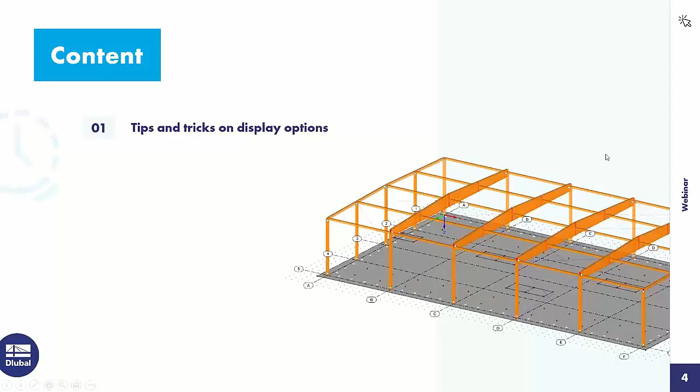To the agenda today: I will introduce some tips and tricks on display options, also on the printout report, and basic information. I will do a single and multiple print of graphics to the printout report. And I show how to create a verifiable printout report. We turn directly to the program.

In RFEM, that's a storage building made of timber and a reinforced concrete floor slab, with bracings from steel, as you can see. The model is completed, it's designed; the timber structure is designed, and also the concrete structure.

We can go through the load cases: self-weight with roof loads and single loads from racks, snow load, the imposed loads with loads from forklifts and from the racks, wind in X direction and Y direction, imperfections in X direction and Y direction, pre-stress, and then there are a lot of load combinations that are automatically created by the program.

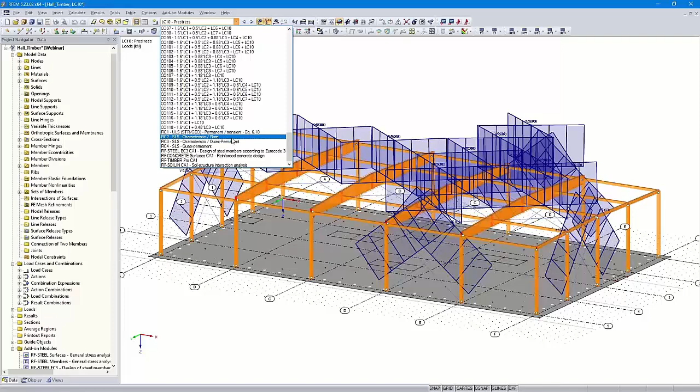Also four result combinations, one for the ultimate limit state design, three for the serviceability limit state design, then the design of the steel structure. Those are only the bracings. You can see a design ratio of 55%. Then the concrete results, also for the floor slab.

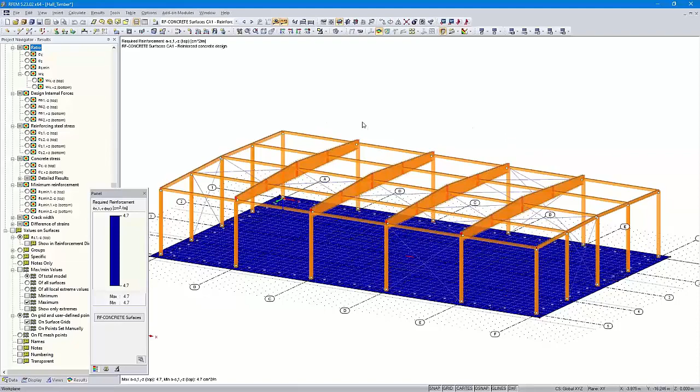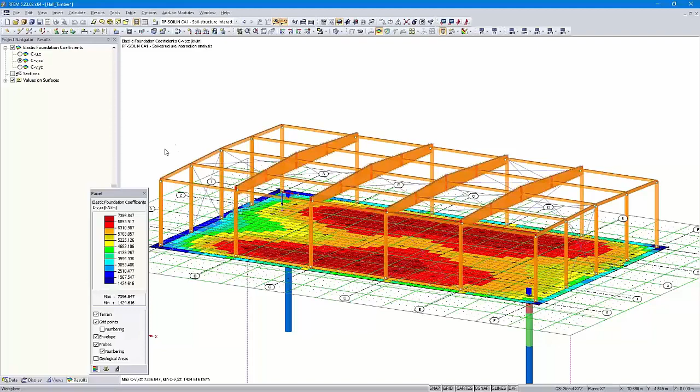Then the results of the timber design. Here you can see a design ratio of 94%. That's in the horizontal beam here, the maximum design ratio. Then I used RF-SOILIN to determine the elastic foundation coefficients. But we want to start with the member results. We want to print them in the printout report.

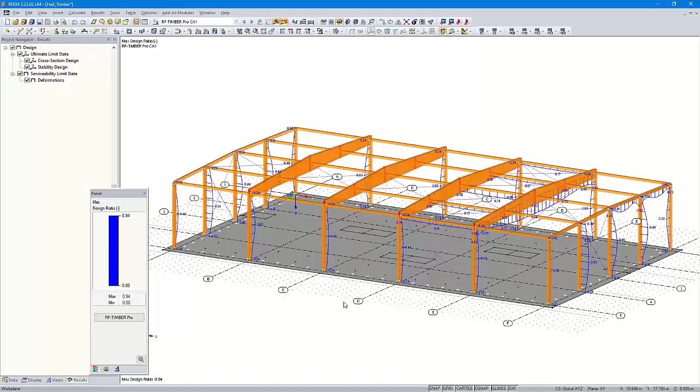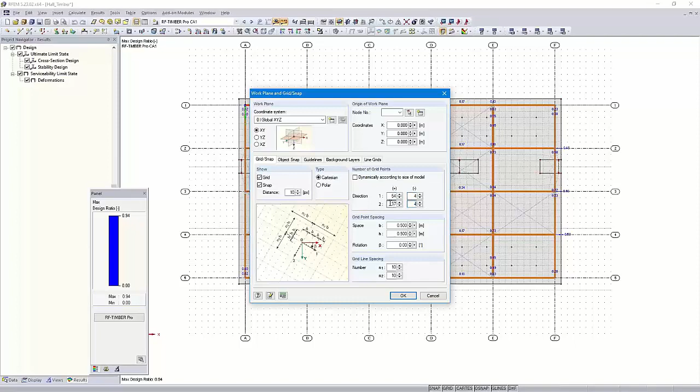But at first, I would like to move the axis designations closer to the model. How to do that, I can show you maybe in the side view. We go here with a right click in the grid options, edit. And then here is checked dynamically according to size of model. We uncheck it and then I subtract here 5. Okay, and then you can see the axis designations are closer to the model.

You can also hide the axis in the display navigator under guide objects, and then you can uncheck the guidelines and the axis would be hidden, but we would like to show them and document them.

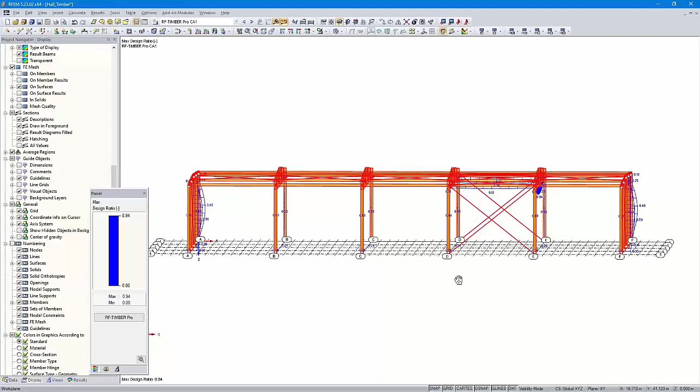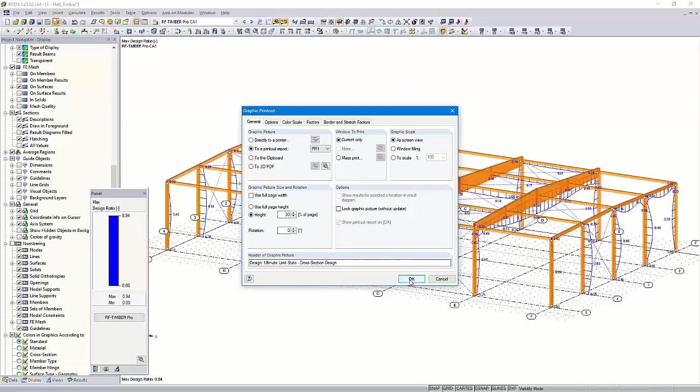Then I make only the timber structure and the steel structure visible with that option, visibility by selected objects, and the concrete floor slab is hidden. Let's print that graphic in the printout report. Here above, print graphic to the printout report, the current only as screen view, that's the option I will use. Then the height, 50% of the page, no rotation, and I confirm that.

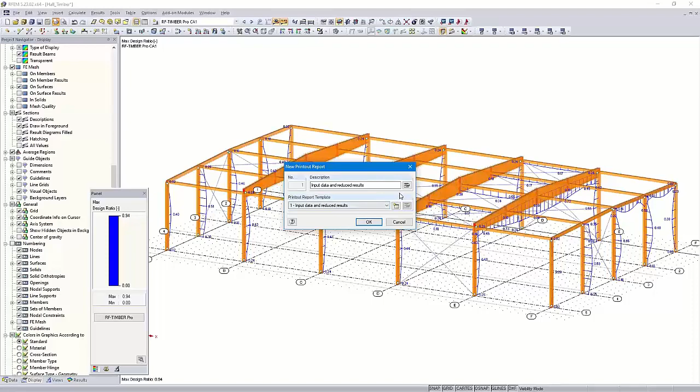So usually we would print the graphic with this option here for the printout report, input data and reduced results. But you can also use other options. But in that case, I would like to disable a lot of pages because we want to print the graphics firstly in an almost empty protocol, or in a protocol with not so many pages, and therefore I disable here the RFEM data, the RF-STEEL data. I leave the concrete and timber data because we would like to print graphics in those chapters.

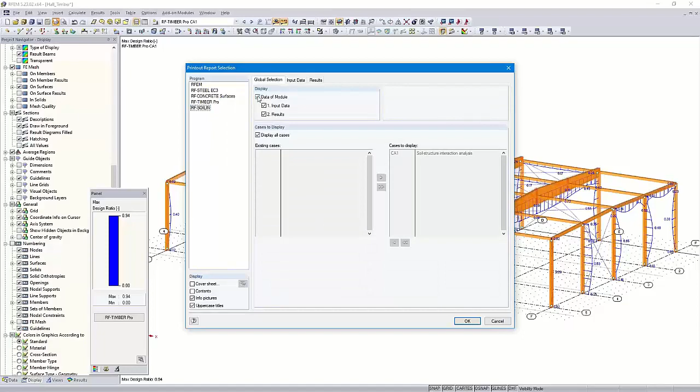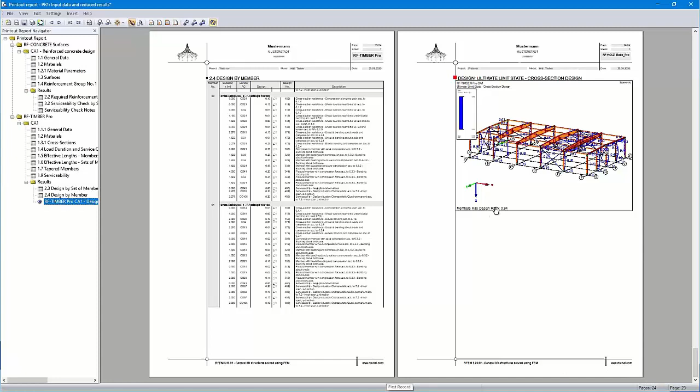So now a printout report with only few pages is created. At the end, we will have more than 170 pages. Now there are only 24, and the handling of the graphics is much better. We can see that graphic is quite confusing, but we can modify that afterwards. By right click, I can open the properties and I can rotate the graphic.

At first I use the full page height and rotate the graphic 90 degrees. Okay, quite better, but I'm not satisfied with this graphic. I will change it here with right click and edit.

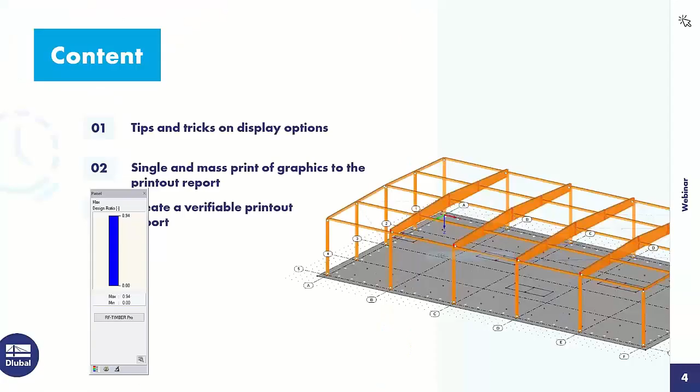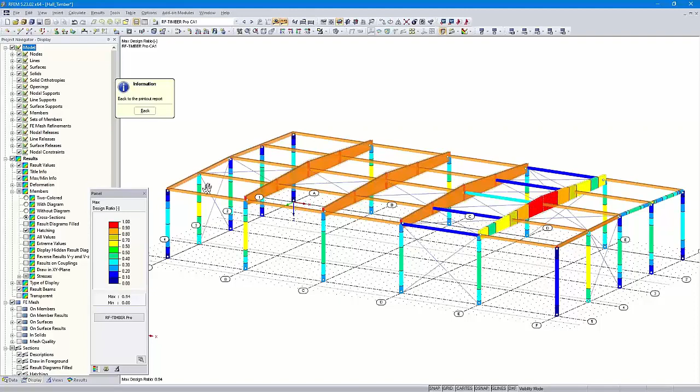I go back to RFEM, and then I can set in the display navigator under results, members, the option two-colored, that's the current state. Then with diagram, it's colored here. Then without diagram, and cross sections. I think that's a good overview. You can see the maximum design ratio is in the horizontal beam here, and I can go back to the printout report.

Okay, that graphic is much better. We will use it, and we would like to print that graphic of the axis E separately in the printout report. We leave the printout report with saving that graphic.

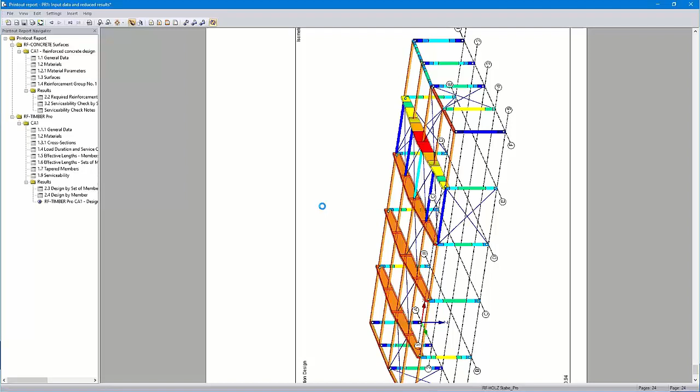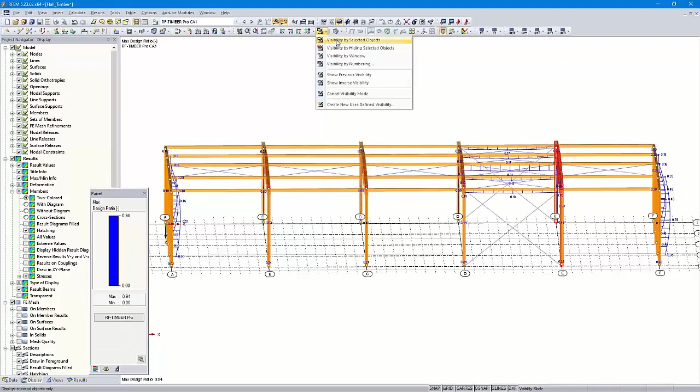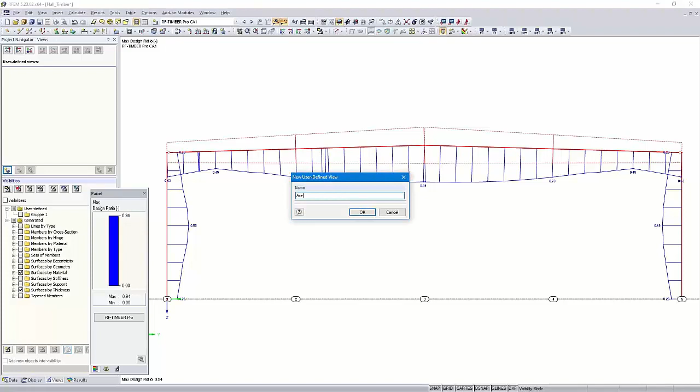Then I create a new visibility. I use this option here, the same as when I click the right mouse key, visibility by selected objects. I use the wireframe display mode, and we can create a view. For example, here, create new user-defined view. I can call it axis E.

You can go back easily later to this graphic. I'll show you: I cancel the visibility mode. For example, this view, and I click here to axis E and come back to this graphic. Here you can see the 94% design ratio. We print that graphic, that's quite easy now.

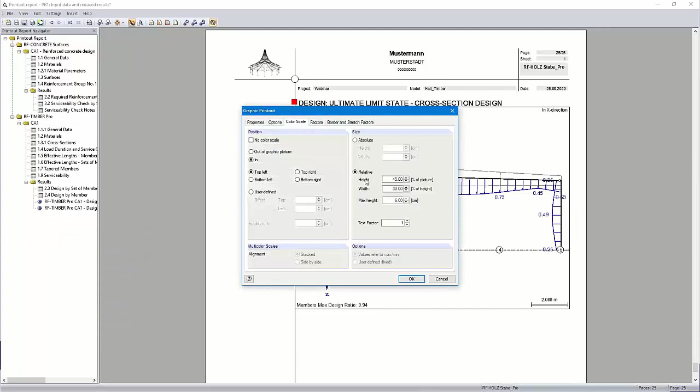Now that graphic is also created. It's quite sufficient. I could make the panel smaller here with properties. I can use a color scale and width of 20%. That looks better. I could move that to the right side a little bit, but I don't do that.

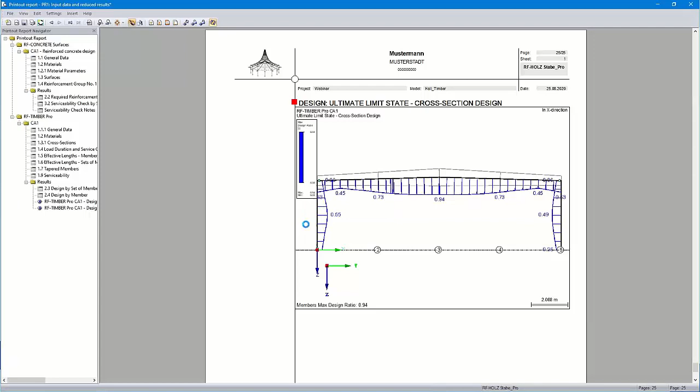We leave the protocol with saving the graphics, and then we print the reinforcement results.

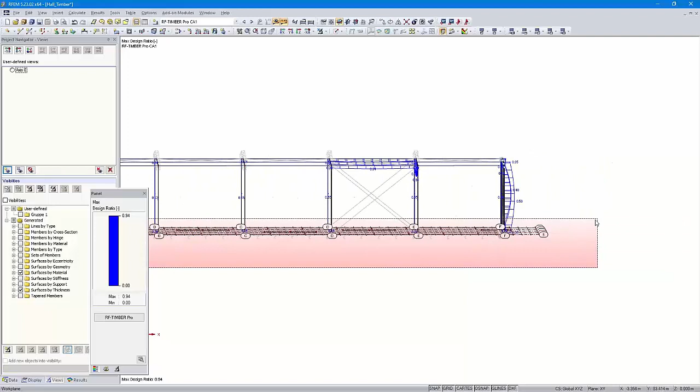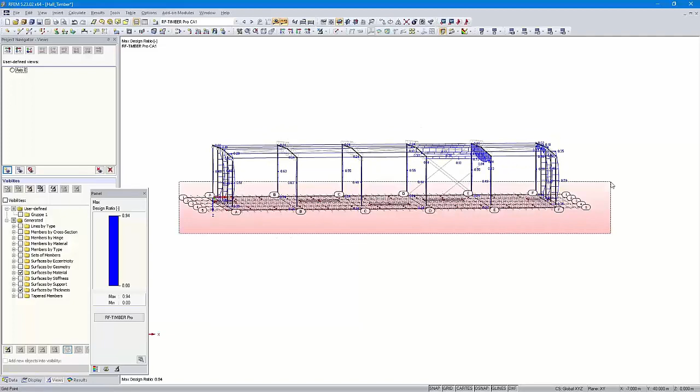I choose only the concrete floor slab in the view. Just a moment. A view in Z direction.

A small tip: when you zoom in and out in a graphic with the mouse wheel, you can see steps. If you want to zoom in and out without steps, you can press the Shift key and the middle mouse key, and then move the mouse back and forward, and you can zoom in and zoom out continuously.

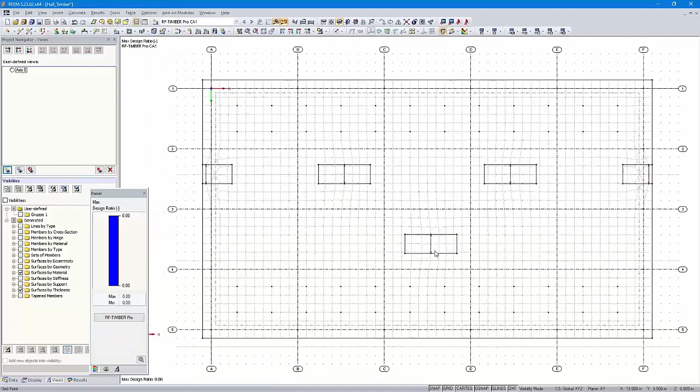Then we go to RF-CONCRETE Surfaces and the results. Those are the required results governing the ultimate limit state and serviceability limit state. You can see there are almost the same values in the concrete floor slab because of the restrained design.

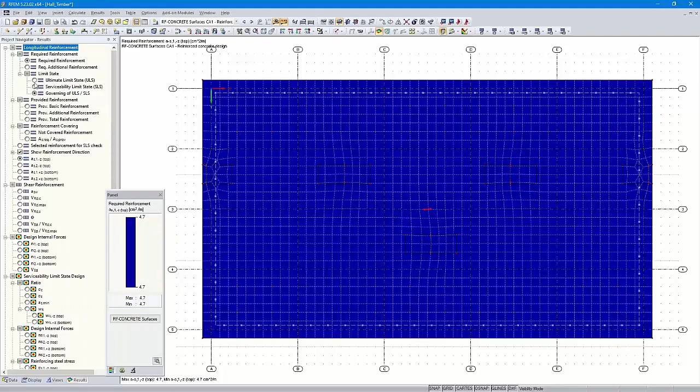I use in this webinar the graphic of the ultimate limit state design. This graphic has more different values. You can see here the values between 0 and 2.7, and 0 and 2.8. Those graphics are more informative.

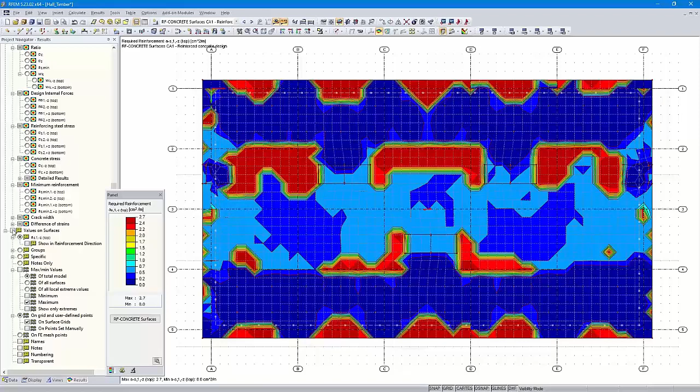I could print that graphic, that would be absolutely sufficient. But I would like to do a more difficult task. I would like to print a graphic with all values in all grid points. I check here values on surfaces, on grid and user-defined points.

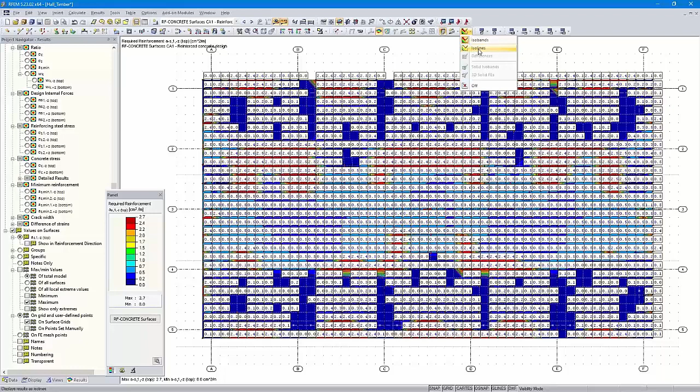And when I have all values here, I can use not the isobands, but the isolines. Then I test the print. I print the graphic. I use the full page height and rotate it 90 degrees, and we will see how it looks.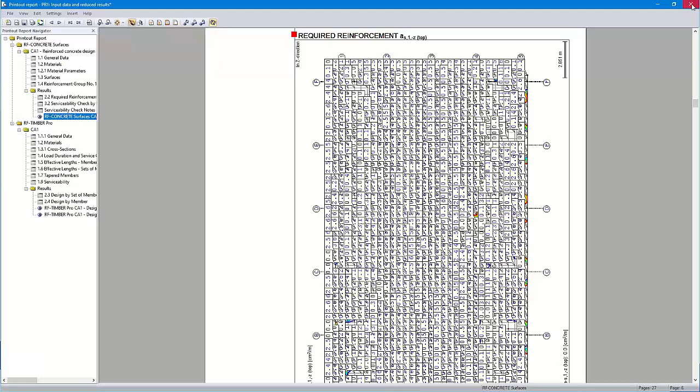Now we can see the values are too large. The graphic is quite confusing, and we leave the protocol without saving.

By right-clicking at one value, we can open the display properties, and we are on the right place here: result values on surfaces. We can change the settings separately for the screen and the printout report, but we can also use identical settings for both. We change only the setting for the printout report.

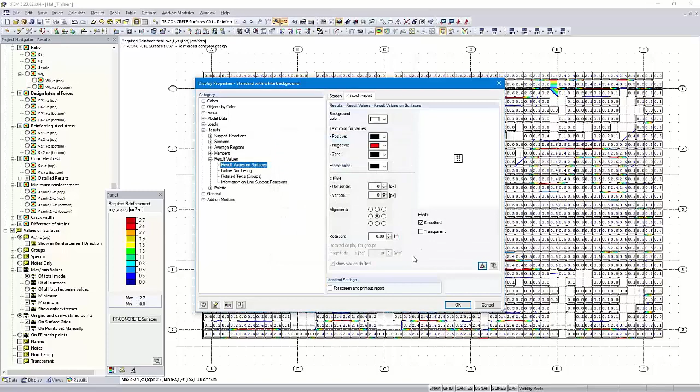I use the black color for the values here. Then I delete the arrow here. Then I move the values to the middle of the grid point, and I change the font size to 4. That's in German because my Windows is in German, but it doesn't matter. So, okay.

And then we print it again with the same settings. Just a moment, and then we will see that it looks much better now.

Now we can read all the values here. At least for a PDF print, it would be absolutely okay.

Then we leave the printout report because I would like to show you a mass print only for 4 pages, for the 2 directions here, and for the top and the bottom, meaning the reinforcement.

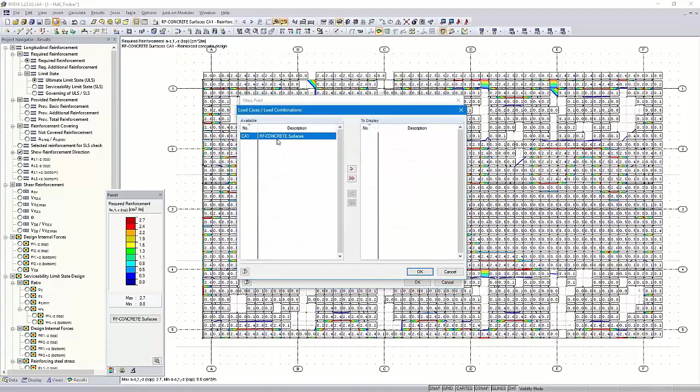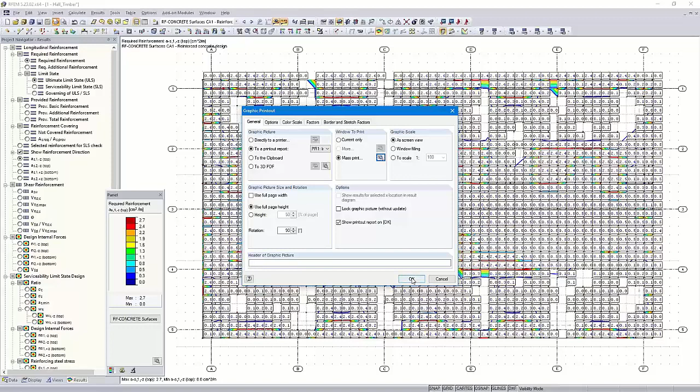I go here to print again and choose mass print. I change the mass print settings and select the concrete surfaces, module data, choose ultimate limit state design, and AS1, AS2 for the top and both for the bottom. I could also add other graphics, but for this example 4 pages or 4 graphics are sufficient. You can do that the same way if you want to print more graphics.

The mass print works for member graphics or graphics with member results as well, but I would like to show you the function for the surface results. Just a moment, and then all graphics are visible.

I click our graphics here. You can see it's okay.

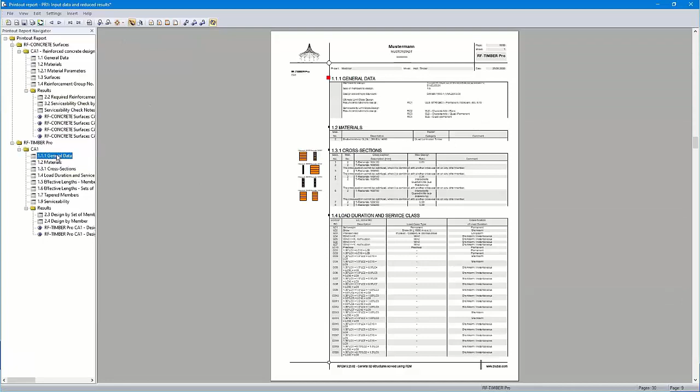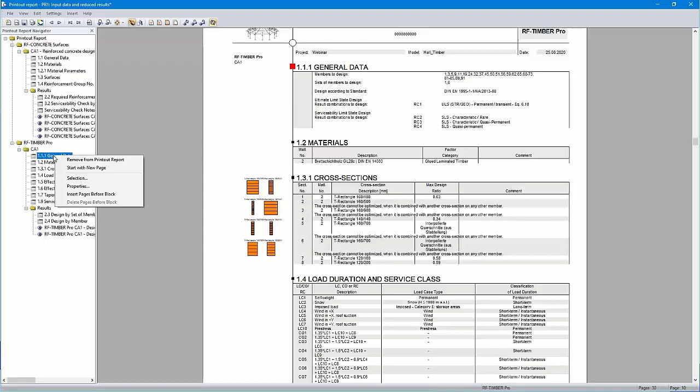A small tip: for example, if you want to add comments, etc., in the left column, you can click here with the right mouse, then properties, and you can add text. For example, design notes.

Just an example. Here you can see it. Just a small tip. Okay, then some basics.

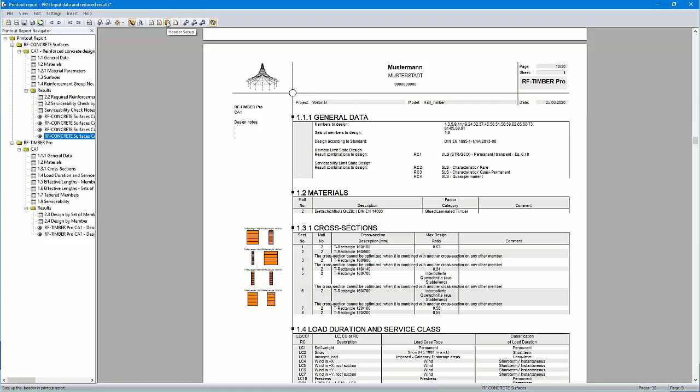For example, we can create a header by clicking here, header setup. We can open the library and create a new header. I already created a Dlubal header with the name of our company, the address, and the logo.

You can change the first number of the protocol, for example. Here in the settings, you can add prefixes, etc.

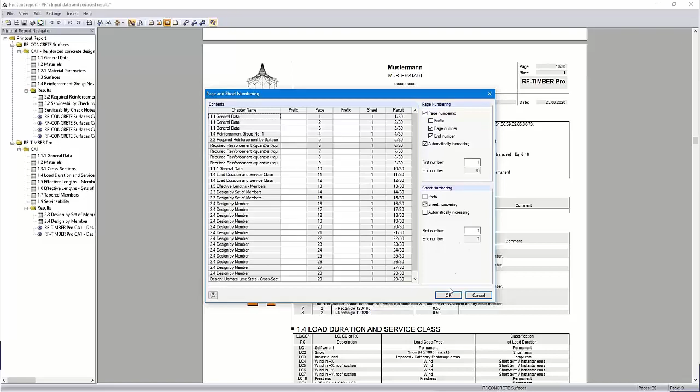So the header should be okay now. Yes, okay. Then we create a cover sheet, here with cover setup. You can also show the picture of the model automatically.

I can add some text here. I prepared the text, it's only fictive text. But we would like to do the printout report complete. Okay.

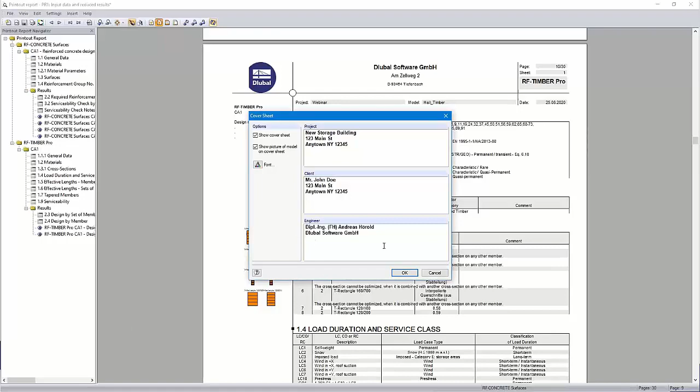That's the cover. You can see that takes not much time. We can go to the next point.

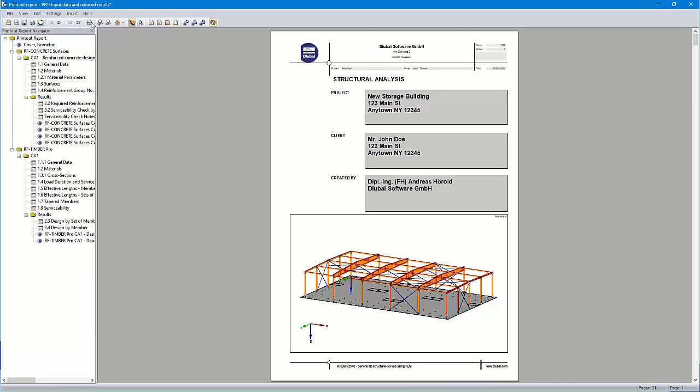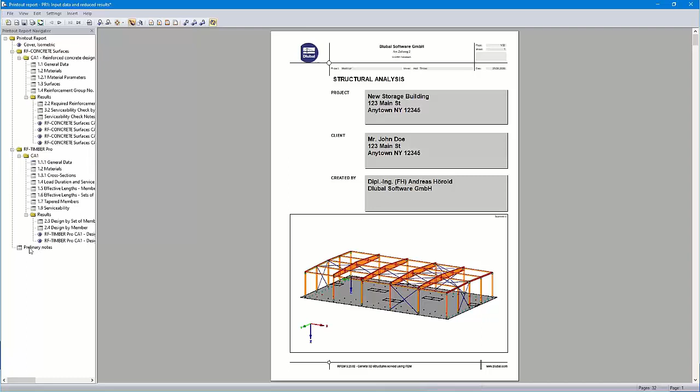You can insert text blocks, text files, images. Now I will add a text block, here the preliminary notes. I have prepared also some dummy text, only the first sentence is correct, the rest is dummy text. It will be added at the end of the protocol, but we can move that later to the right place.

I will add an image from a clipboard. I go to our website, and here under solutions you can find the online services, for example the GeoZone tool, cross-section properties, the glossary. I think some of you know that tool already. It's for free. We have got a lot of international standards, also the Eurocode with the national annexes. I use Germany here, and I entered the address of our office in Leipzig.

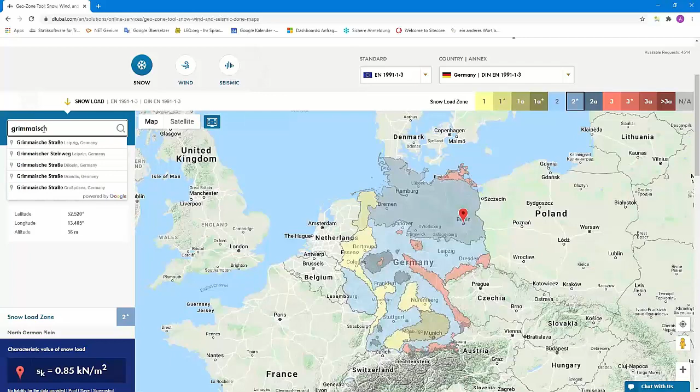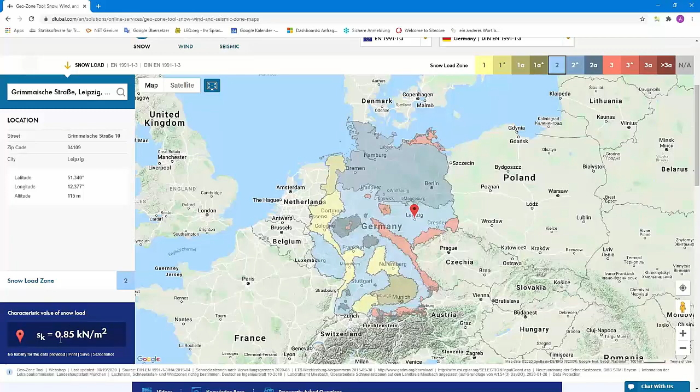Okay, and we can see here snow load zone 2 and the characteristic value of the snow load. And we can create a screenshot.

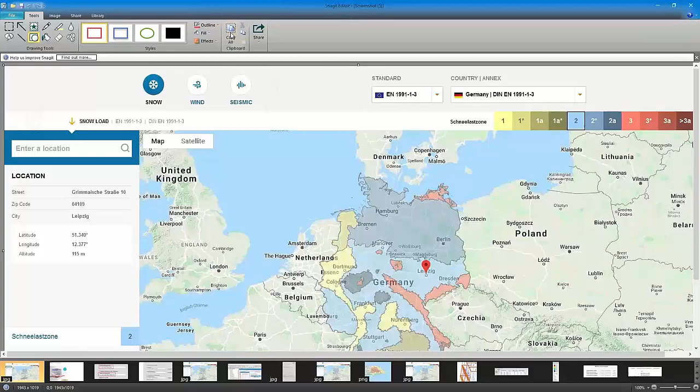Then we can open it with an image tool. For me, that is Snagit. I can copy it to the clipboard and then insert it into the protocol. I call it snow load zone. And you could do the same with the wind loads, earthquake load zones, and so on.

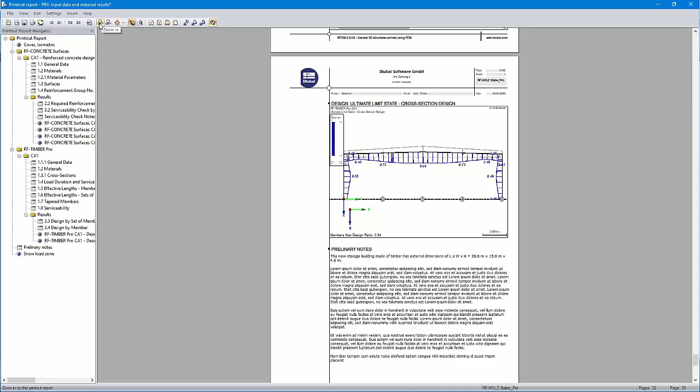Also other graphics. Okay, in the next step, or some other tip now again: you can add empty pages.

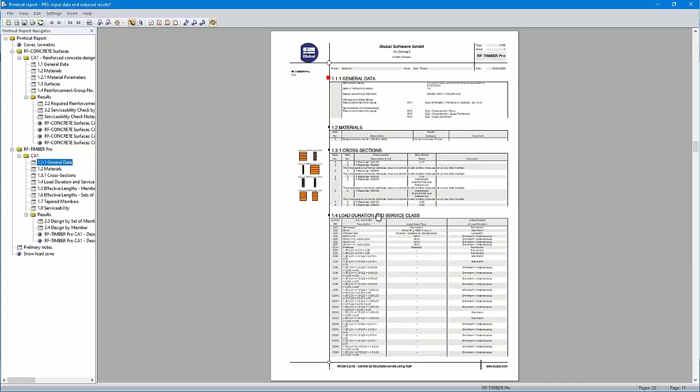For example, you would like to add pages from external programs, etc. into your protocol. And then you see here, that is page number 11.

And by right click I can insert pages before the block. I call it test, and 5 pages. Okay.

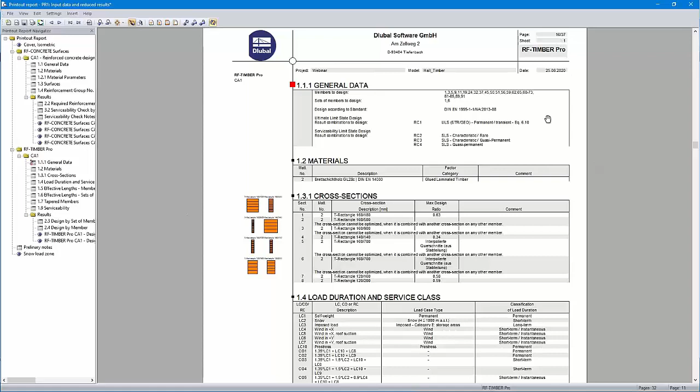And then you can see it's page 16, and this page is page 10. Oh. But I will delete them. Okay, just for info. Now it's page 11 again.

And the next step is to select the topics. First I check here contents, we would like to show the content. Then the RFEM data. I choose the steel data, those are already in the protocol.

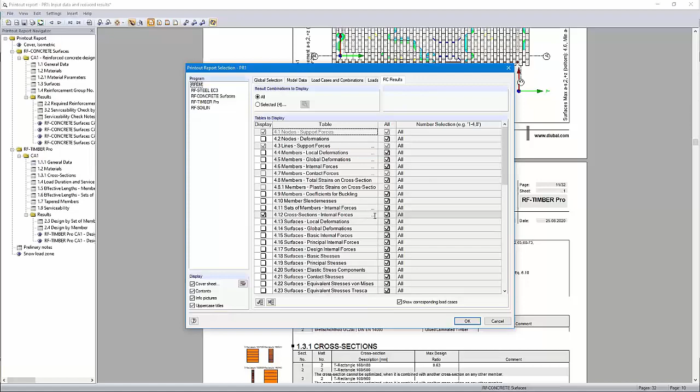Now you can use the settings which you like. You can disable some content. For example, I will disable the results of the load cases and load combinations, and use another setting for the cross-section internal forces. I choose here not the partition values, but the extreme values of the cross-sections.

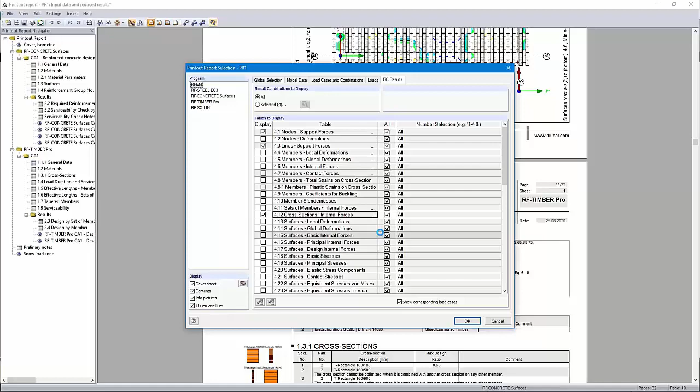Therefore the protocol will not have too many pages. Okay, then the whole protocol is created in a few seconds.

So you can see all the module data. I moved the preliminary notes to the beginning.

Just a moment, you can see now we have got 170 pages. So I move it behind the contents.

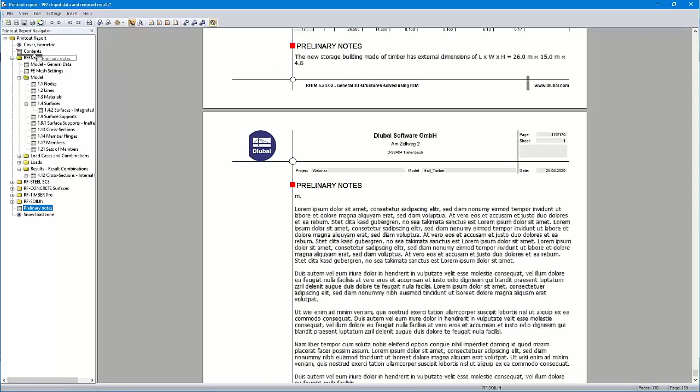Okay, now our pages will be renumbered. It takes some time. So, and I moved this snow load graphic here in that chapter. I have to wait some seconds. Okay.

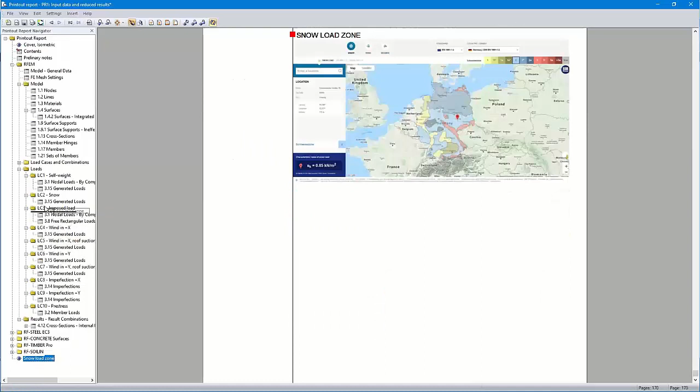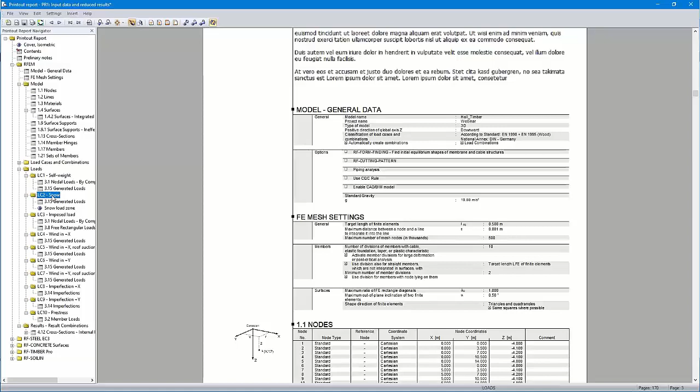So we jump to the preliminary notes. The cover sheet, the contents, preliminary notes, and then the RFEM data are shown. Here, snow, the generated snow loads, and the graphic from the Dlubal homepage.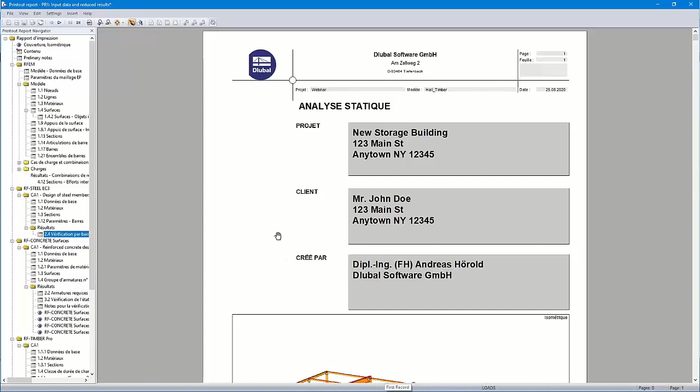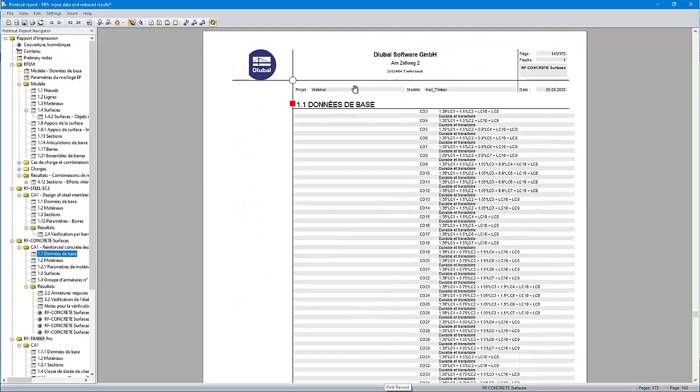Okay, just have to wait some seconds. I'll show you some other parts. Here, the whole protocol is now in French. We translate it back. Okay, that will take some time.

You can export the printout report to VCmaster, for example. How to do that, I would like to show you with the help of a knowledge base article. Sandy Matula wrote this article, and she did also a short video where you can see how it works.

You can also print the printout report as a PDF, on my printer. I can show you file, for example, export to PDF, export to RTF, that's a text file. Can print it directly to a printer, also to a PDF printer. I can start it - it would take some time. I'll cancel it and show you the complete report instead.

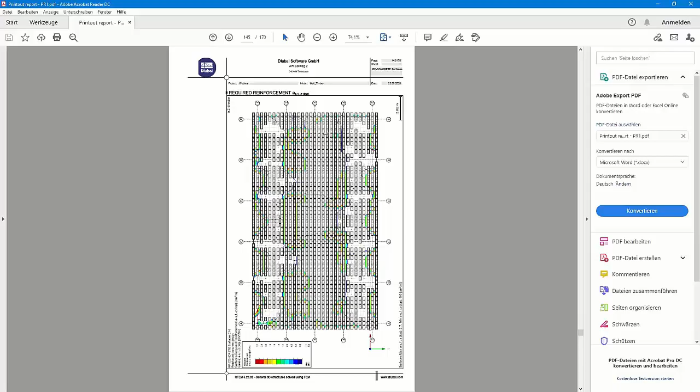That's the PDF. You can see the graphic here. It looks quite good. That's the whole printout report as a PDF file.

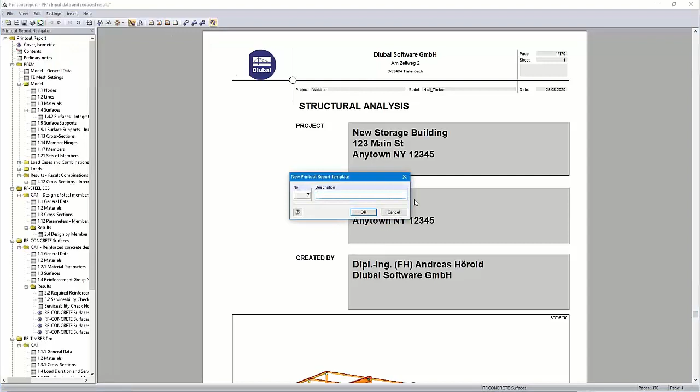Another tip, you can save printout report templates. For example, you can use those settings here for a new template. Then you need to choose here new from current printout report, and then you can enter here a name and save it. You can also save a new template. You can here check and uncheck the chapters that you want to display.

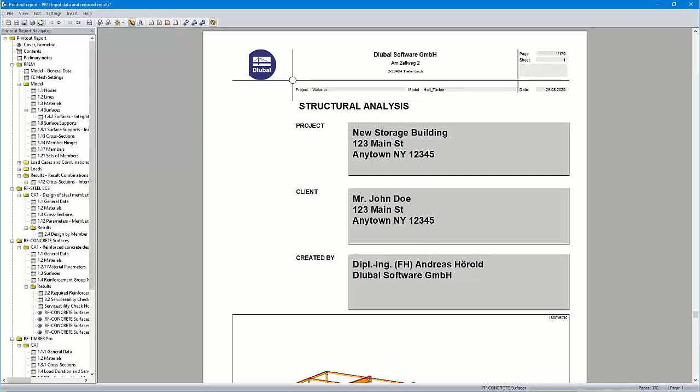As promised, I show you the article about VCmaster. Here under Support and Learning, you can find a lot of FAQs and knowledge base articles.

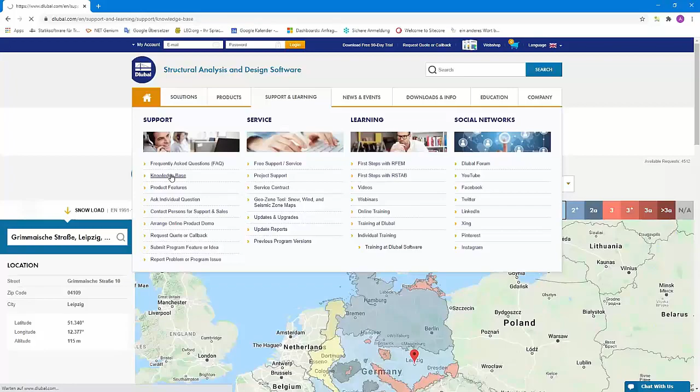I open the knowledge base database. You can see a lot of articles. I use the full text search, VCmaster, I searched already in the test for it. Okay, here are 3 articles.

I will show you the article export to VCmaster. Here's a short description, and here you can see that Sandy wrote it. Maybe we can take a look at the video.

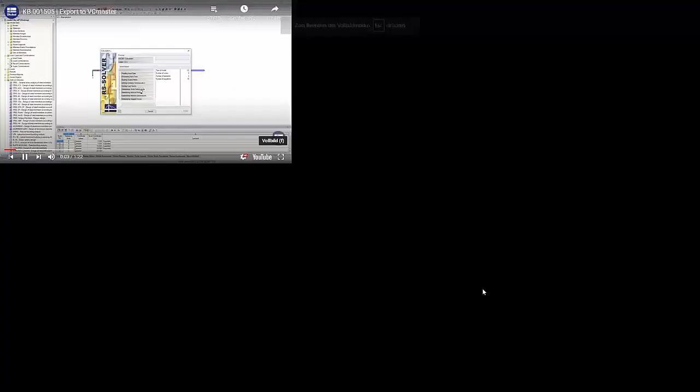An easy beam, a free field beam with a cantilever, and it's printed in the printout report as we did it in the webinar today. This simple example has only 4 pages.

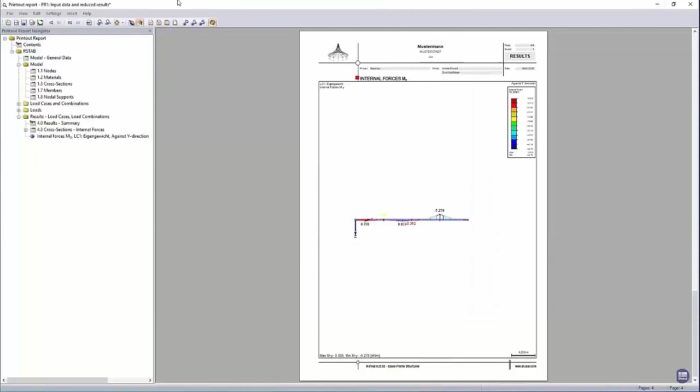Now with that graphic, VCmaster must be opened before you export anything from the printout report to VCmaster. Then you can click at the top to VCmaster, and then you can choose the pages that you want to export.

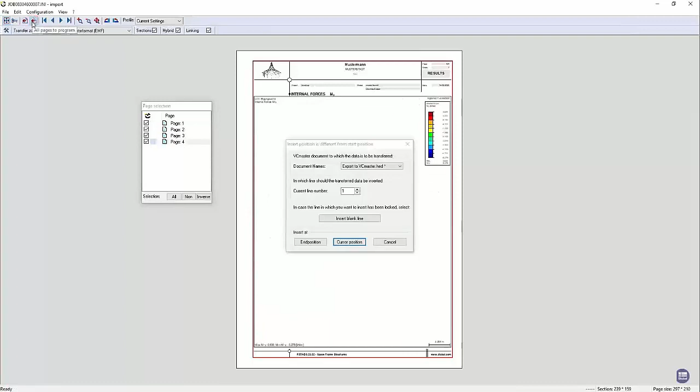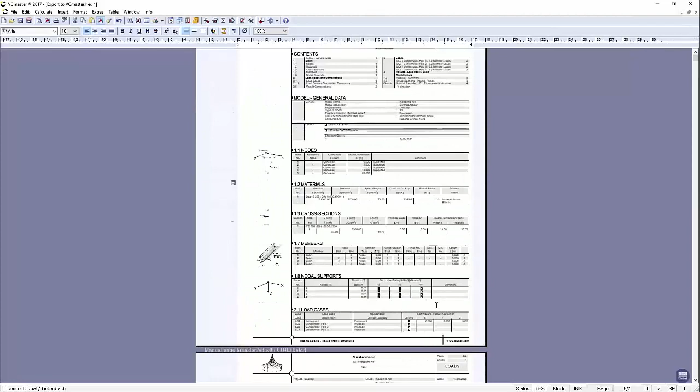This report has only 4 pages, and all pages are transferred in some seconds. Yeah, okay. You can also add to this VCmaster tool other printout reports, also from other programs. Yeah, it's quite easy to handle, just test it.

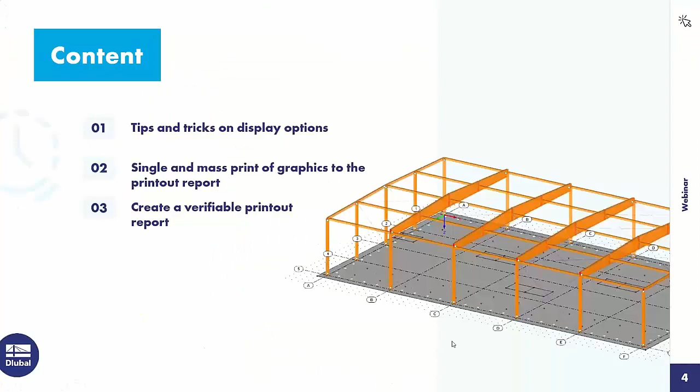Then I go back to the PowerPoint presentation. I would like to introduce you some free online services. I already showed the Geo-Zone tool with a lot of codes where you can determine the snow, wind, and seismic load zones, etc.

Then the cross-section properties, it's also a free online tool for standardized sections, and you can also define your own parameterized cross-sections and calculate then the properties. I showed already also the FAQs and the knowledge base, a lot of valuable, informative stuff.

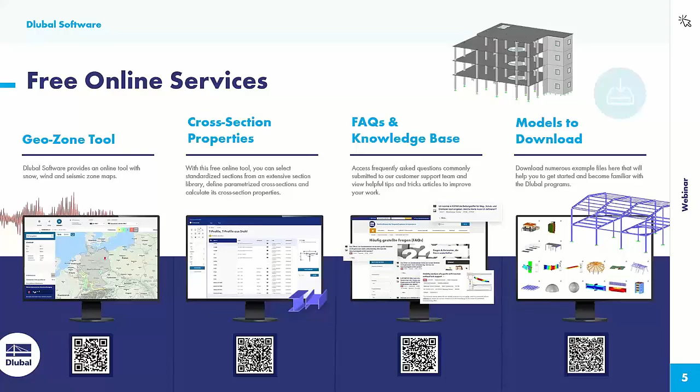Then you can download models from our website. The Dlubal engineers created them. You can find there also the model of today's webinar, also of our other webinars. Then I've got our YouTube channel with the webinars and the videos, all for free, of course.

Then the web shop with prices. You can create your own offer as a PDF. You can configure it by yourself. Then use our trial licenses for programs that you don't know, for example RWIND Simulation, SHAPE-THIN, SHAPE-MASSIVE, etc.